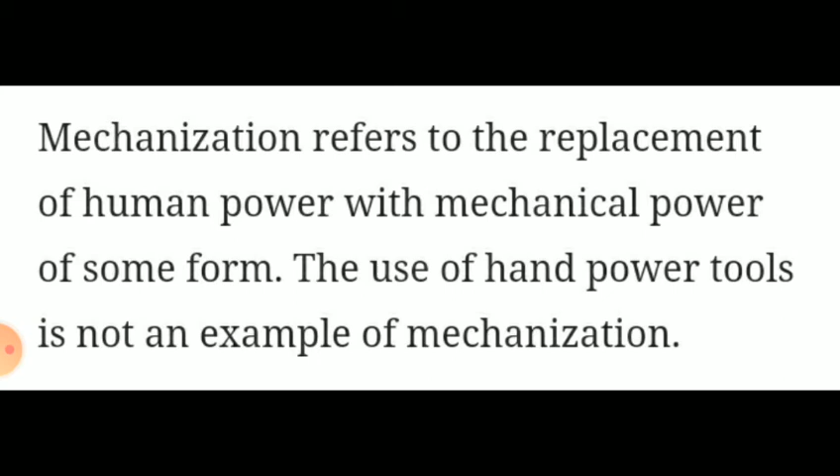Mechanization refers to the replacement of human power with mechanical power of some form. The use of hand power tools is not an example of mechanization. So mechanization means something is done or operated by machinery and not by hand.

So, mechanization was the next logical step in the substitution of chemical for muscle power once small and light enough power sources became available. The process of having a machine or machines accomplish tasks performed wholly or partly by humans.

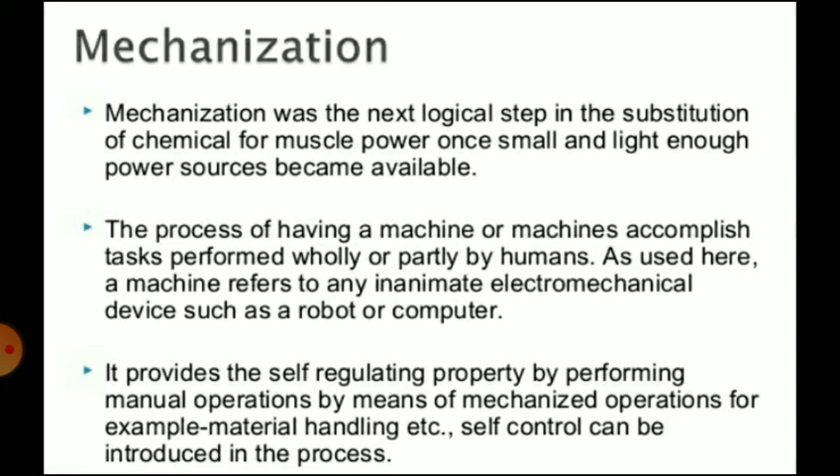As used here, a machine refers to any inanimate electromechanical device such as a robot or computer. It provides the self-regulating property by performing manual operations by means of mechanized operations. For example, material handling, etc. Self control can be introduced in the process. So it is based around the machinery and equipment that ensures accuracy and speed of operation.

Now the automation. The word automation is derived from the Greek word automatos, meaning self-acting. Automation can also be defined as the process of following a predetermined sequence of operations with little or no human intervention using specialized equipment and devices that perform and control the manufacturing process.

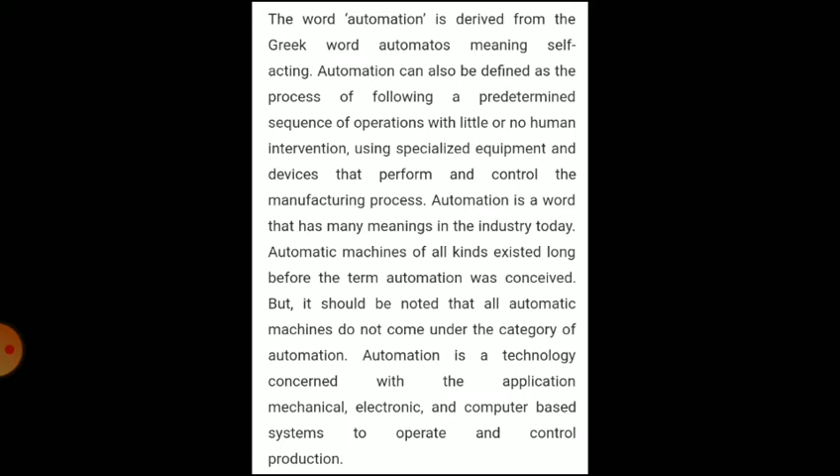Automation is a word that has many meanings in the industry today. Automatic machines of all kinds existed long before the term automation was conceived. But it should be noted that all automatic machines do not come under the category of automation. So, automation is a technology concerned with the application of mechanical, electronic, and computer based systems to operate and control production.

If we see the difference between automation and mechanization, mechanization refers to the replacement of human power with mechanical power of some form. The use of hand power tools is not an example of mechanization. So, automation and mechanization are often confused with each other. Mechanization saves the use of human muscles, whereas automation saves the use of human judgment. Mechanization displaces physical labor, whereas automation displaces mental labor as well.

Mechanization affects one or two industries at a time. Automation is a replacement of human thinking with computers and machines. Automation creates jobs for skilled workers at the cost of unskilled and semi-skilled workers. It affects many industries at the same time.

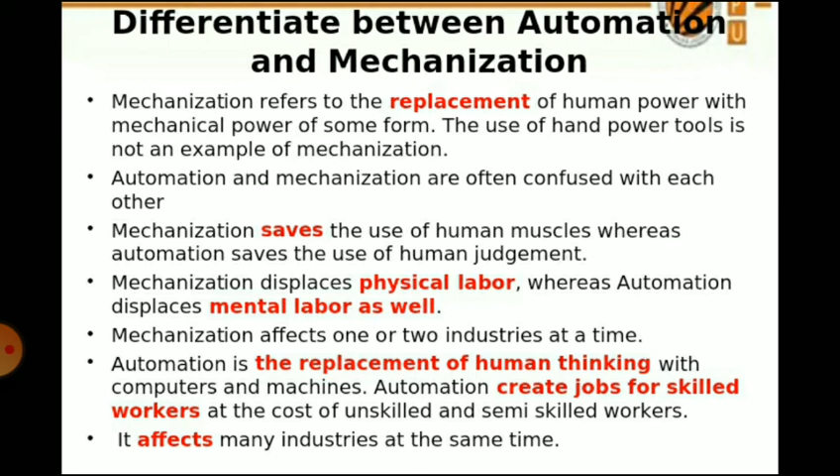Now, regarding mechanization, it is based around the machinery and equipment that ensures accuracy and speed of operation. So, mechanization of manufacturing means a trend towards minimizing human effort by adopting mechanical and electrical means or methods for automating the different manufacturing processes. Such a trend may be in the area of automating and mechanizing the processes of material handling, loading and unloading of components, actual operations performed on the job, or transportation, etc.

In case of automation, automation can be defined as the process of following a predetermined sequence of operations with little or no human intervention using specialized equipment and devices that perform and control the manufacturing processes. The information recording, processing, and controlling by mechanical and electronic devices is called automation.

So, reasons why one should go for automation are: increase productivity, reduce cost of labor and dependence on labor shortages, improve quality, reduce in-process inventory, reduce the manufacturing time, reduce dependence on operator skills, and increase safety or reduce risk to humans. Next point that we will discuss is the product cycle.

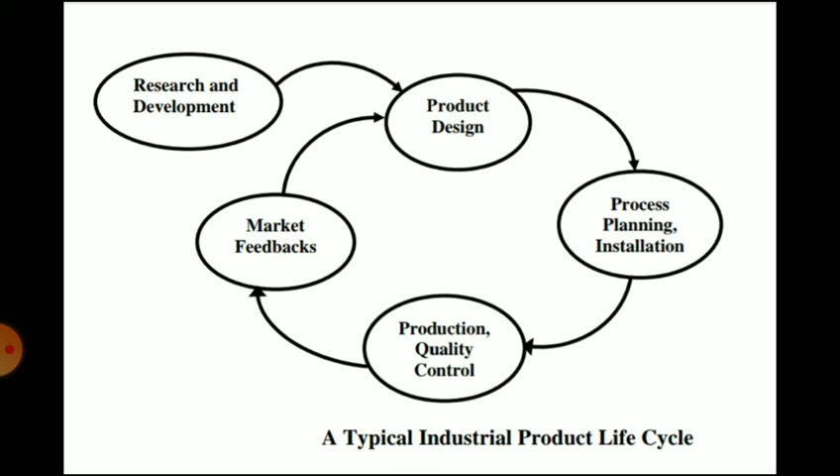Industrial products go through their life cycles, which consist of various stages. At first, a product is conceived based on market feedback as well as research and development activities. So this is the first stage. Market feedback and research and development give the product design. Once conceived, the product is designed.

Prototype manufacturing is generally needed to prove the design. Once the design is proved, process planning and installation must be carried out to ensure that the necessary resources and strategies for mass manufacturing are in place. This is followed by the actual manufacture and quality control activities through which the product is mass produced.

This is followed by a number of commercial activities through which the product is totally sold in the market. Automation also reduces the overall product life cycle, that is the time required to complete product conception and design, process planning and installation, and various stages of the product life cycle that is shown in the figure. So this is regarding the product life cycle.

Then we will discuss regarding the hard and flexible automation. So fixed automation means it is a hard automation, and soft automation means it is a flexible automation. So regarding fixed automation, the manufacturing system in which the sequence of processing or assembly operations is fixed by the equipment configuration.

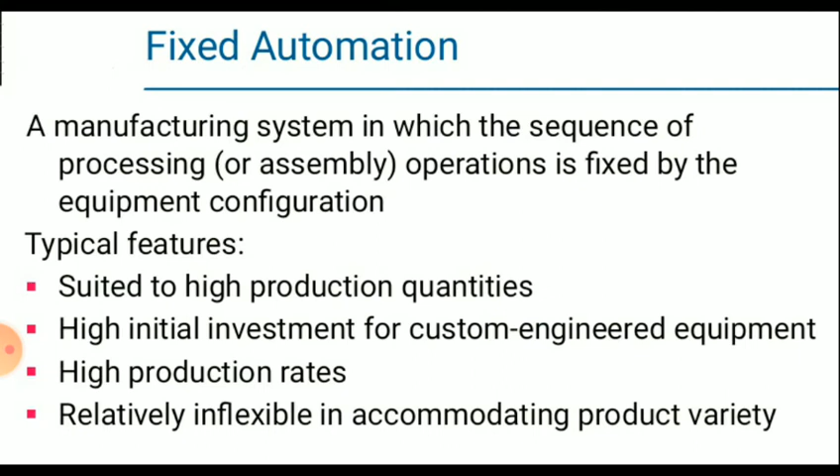Then flexible automation, or it is also called the soft automation, an extension of programmable automation in which the system is capable of changing over from one job to the next with no lost time between the jobs. So typical features of soft automation or flexible automation are high investment for custom engineered system, continuous production of variable mixes of products, medium production rates, and flexibility to deal with soft product variety.

So if you differentiate hard versus flexible automation, the first point, hard or fixed automation is a machine or system that is designed to perform a specific highly repetitive task. In case of flexible automation, it is an equipment or system that is designed to easily change the production line for a variety of products.

Second point regarding hard versus flexible automation. In case of hard automation, the operations are usually simple or a combination of simple operations. In case of flexible automation, the system can produce various combinations and schedules of products. Third point, hard automation typically operates at very high speed, therefore production rate is high. Flexible automation typically operates at medium speed, therefore production rate is medium.

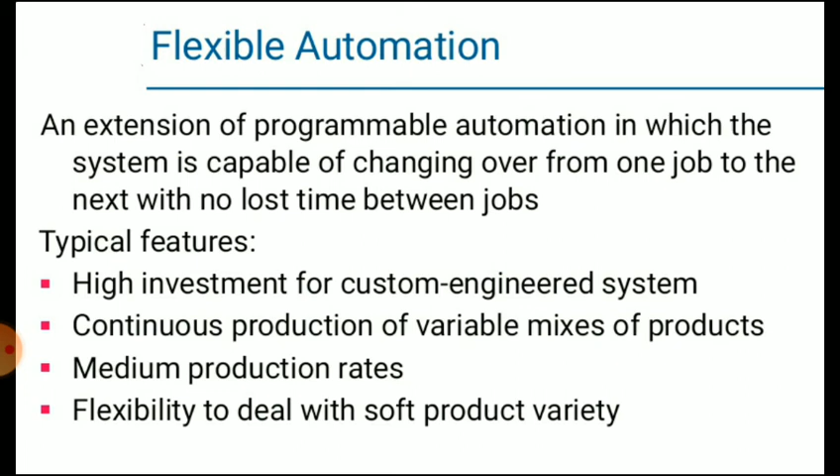So examples of hard automation are mechanized conveyors, machining transfer lines, robots for welding. And examples of flexible automation are flexible manufacturing systems for machining operations.

Now the next point that we will discuss regarding capital intensive versus low cost automation. So first we will see what is capital intensive production. So capital refers to the equipment, machinery, vehicles and so on that a business uses to make its product or service. A capital intensive production process is mostly automated and able to generate a large output of goods and services. Since capital intensive production relies largely on machinery and equipment, such industries require long term investment with a high cost involved in maintaining and depreciating equipment.

So the capital is the resources provided by the owners to the business to do the business. So capital intensive processes are those that require a relatively high level of capital investment compared to the labor cost. These processes are more likely to be highly automated and to be used to produce on a large scale.

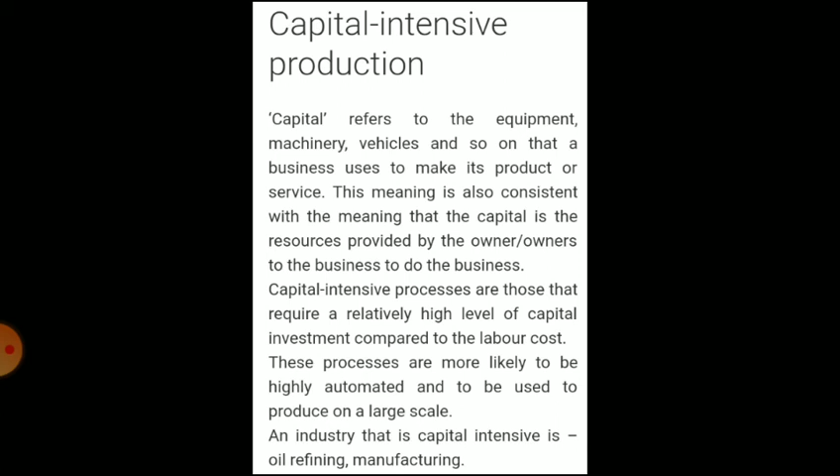So advantages of capital intensive production: it reduces human error, more accurate production, greater speed and uniform effort or output, technical economies of scale, that is increased efficiency which could reduce average cost. So in short, it reduces human error resulting in more accurate production, speed of production, that is efficiency is high, and uniform effort per output, increased efficiency which could reduce average cost, and no problems with labor shortages or planning labor.

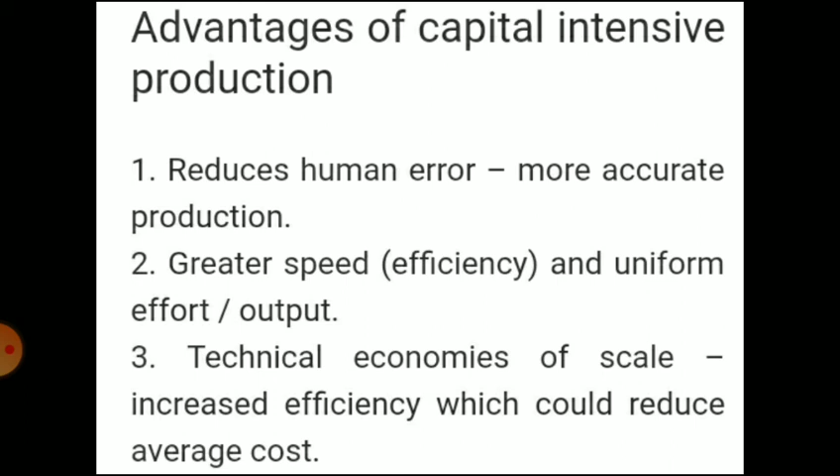Disadvantages of capital intensive production: initial high cost of investment and possible training cost, and lack of flexibility in responding to a change in demand.

Now the next point that we will discuss, that is low cost automation. So every manufacturing industry, irrespective of size and budget, can accommodate their assembly lines by incorporating a new approach towards infrastructure efficiency, result oriented employees empowered to work across various technical disciplines, and a flexible hands-on project management style.

So low cost automation is a strategy or technology that creates some degree of automation around the existing equipment, tools, methods, and people, using mostly standard components available in the market. So it is a strategy that completely relies on in-house resources that can concurrently grow with the project and ultimately get integrated into the company infrastructure upon completion of the project.

So the benefits of LCA: as the name itself implies, investment cost is low and ROI is high in terms of improved productivity and better work efficiency. It provides quality, flexibility, increases productivity, reduces cost, and can be easily implemented and affordable by SMEs.

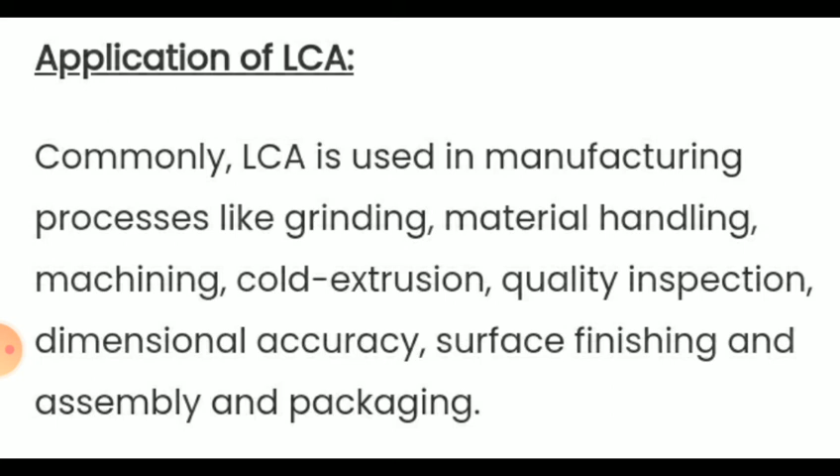Now the approach towards LCA involves the following steps. So the first step is scope of the project. This step involves determining the processes to be automated, the sequence of operations, minimum level of automation and control for every process, and minimum level of material handling between every process. To maintain low cost, content of the project must be consistently guided by essentials only. So this is step number one, that is scope of the project.

Second, building infrastructure to support the project. So create areas for fabricating and assembling parts, subsystems and entire machines. This includes a machine shop, stock room for consumables, fasteners, controls, fabrication area, pneumatic components, etc. So this costs relatively less than a typical manufacturing automation project.

And third is building the system. The team should consist of engineers experienced in designing electrical, mechanical, and software systems. The team should handle and resolve pre-production issues like installing pneumatic components, handling fabricated parts, wiring control panels, etc., and even post-production issues.